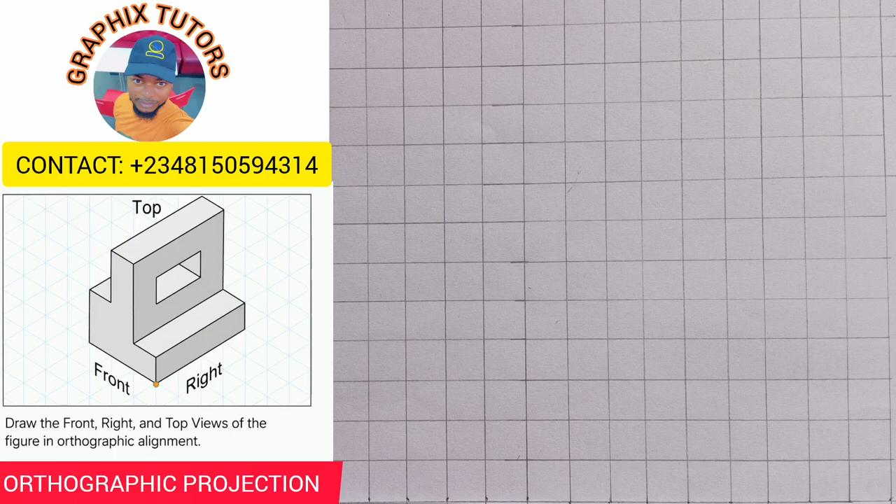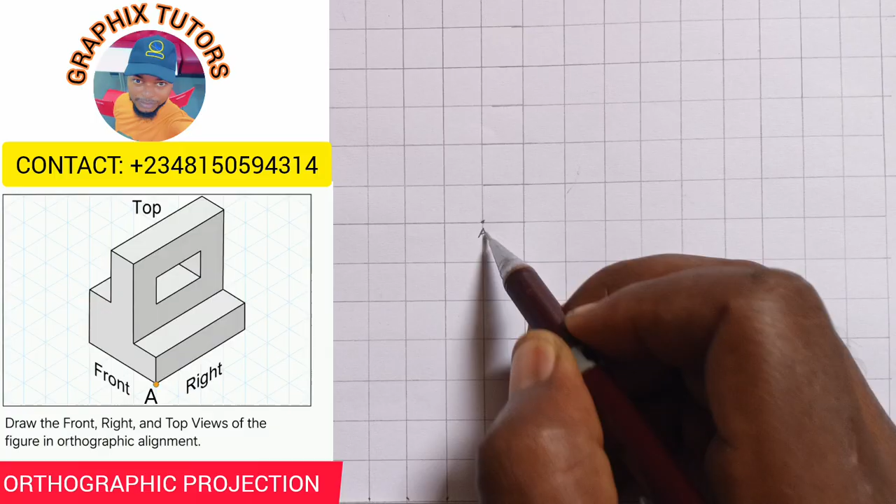Now, like I told you, each of those boxes you see is 10 millimeters, unless otherwise stated. Now, the lowest point here is the point that has the yellow dot that you can see, right? So I can say that point there should be my point A. So I'll pick a point anywhere of my choice. Let's say I'm picking here, right? This is my point A. I can easily zoom it up so we have a clearer view. That is my point A.

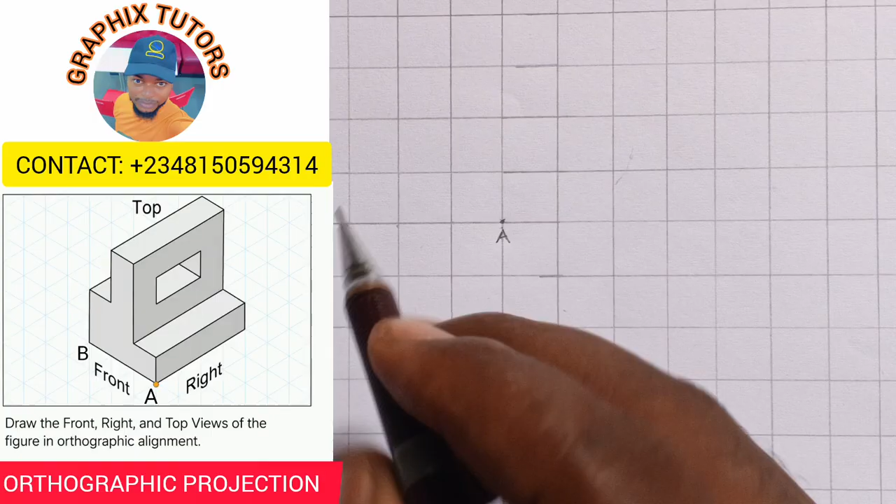Now, if I count backward, because it's going back, I'm using the grid. Each of these grids also is 10 millimeters. So I'm counting back, I have three boxes, meaning it's 30. So from A to B is 30. So 0, this is first box, second box, and we have third box. To point B is 30. So I'm going to tick it right away. 30. Right? Then I want to move to C.

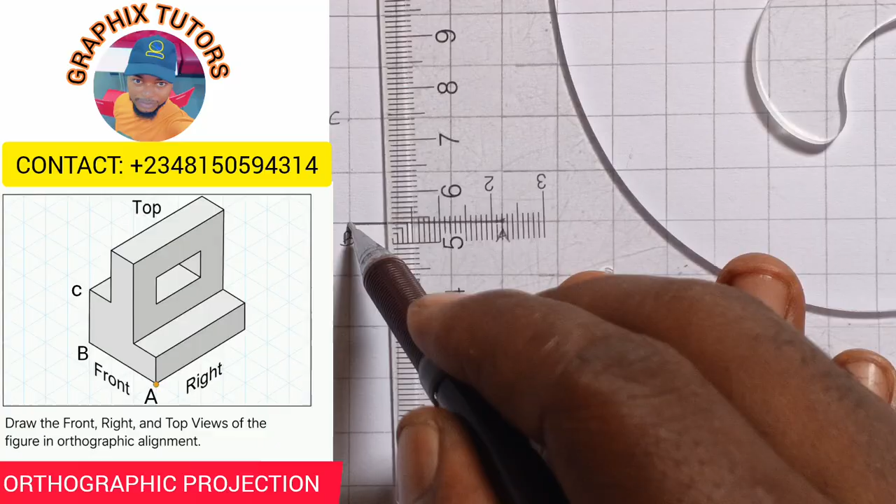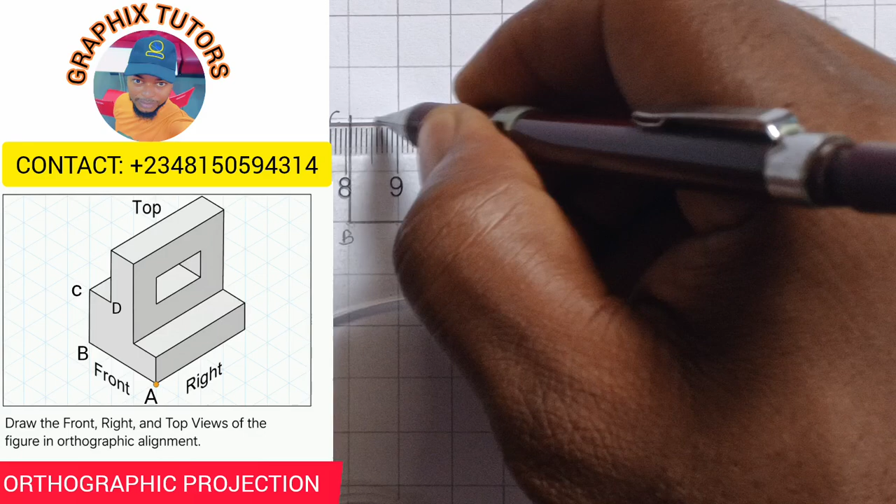So from B to C here, we have two boxes making 20. So I'll move B, 1, 2 to point C, and I'm going to also tick it. Can you see that? And from C to D is just one box. So I'm going to draw just one box. And that's my point D. And from D to E, those are the points I'm looking at when I'm looking at the front. From D to E, I have two boxes. So I'm going to tick it to the two boxes here. Right? This is point E.

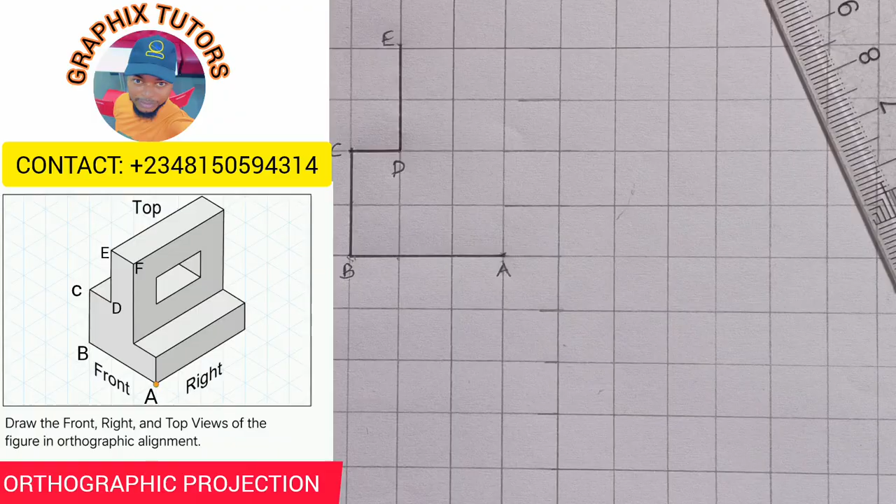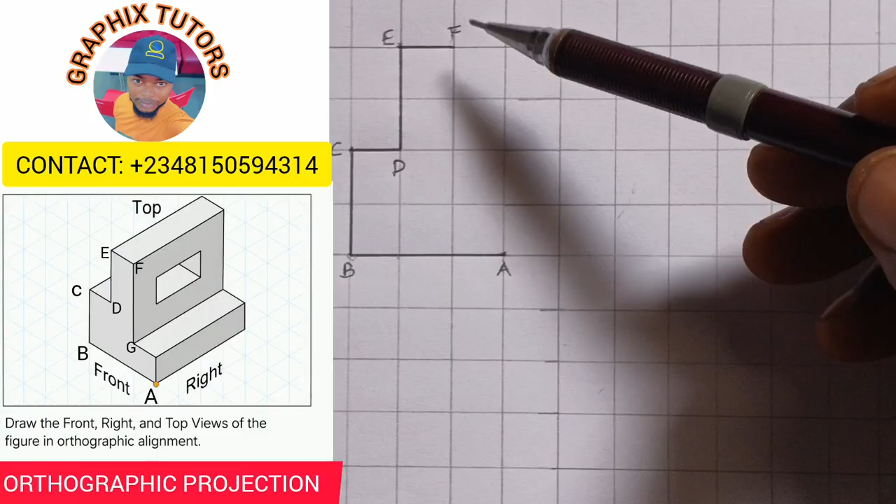So let me bring it down so we have a clearer view. Hope you can see that. So from D to E, we have two boxes. Then from E to F, we only have just one box. So E to F, going towards the right, just one box. Then from F to G, we have how many boxes? Let's count from here. This is 1, 2, 3. We have three boxes, right? So 0, 1, 2, 3. So this point here is my point G. So taking it down.

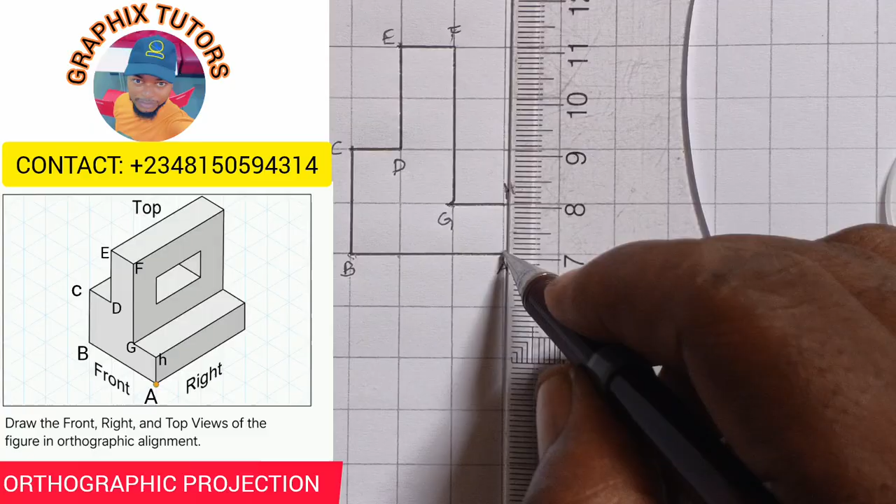Right? From G to H, just one box. So I'll just take it to H, one box. So this is my point H. Then H back to A, that is the yellow dot. We have just one box. So what you just saw here is the front elevation, the front view.

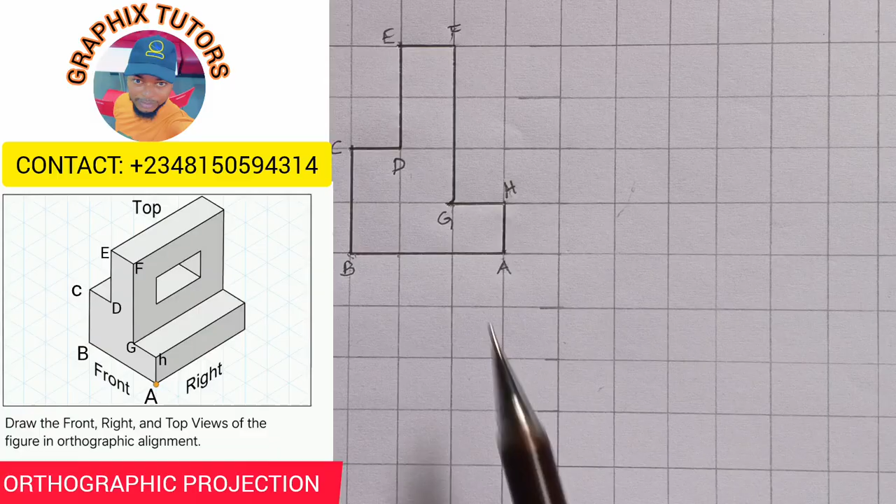After the front view, you can draw either the elevation or the plan. I can start from the plan, but let me just start with the elevation, because the front and the right are always side by side. So we'll leave a box or two boxes in between, but let me just leave one box in between. So I want to draw the right side, which is looking at it from this side. Remember, we have A, meaning that I'm going to be starting from A again. So from A, again here, I stop at H, right?

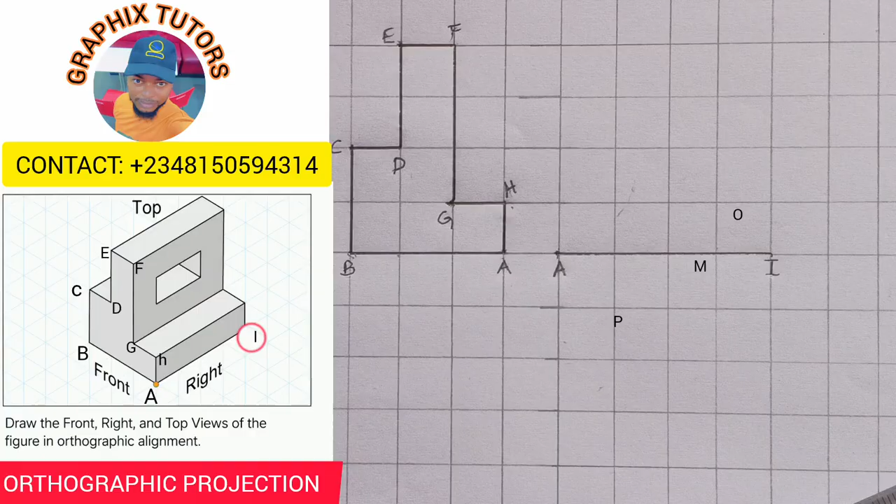So to the next point here, let's call it I. We have how many boxes? 1, 2, 3, 4, 4 boxes. So I'll just draw my 4, 0, 1, 2, 3, 4, and take it to I. So that is the I that we have. Right? Then moving up to J is another 1 box. Then the next one is moving it back to, remember it's H already, right? So I'll just connect J and H this way.

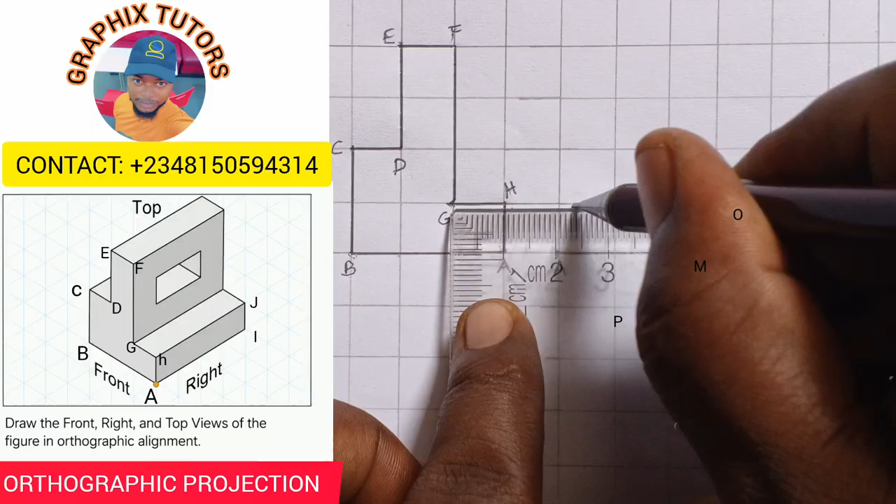Then I'll also connect A to J, to A to H, because here also will be what? H. They're always the same, right? Now the next thing is this first line you see, that is H and J, is overlapping this other point you're seeing here, which is G. And let me call the next one K. We cannot see K because J is overlapping K, but this is my point K. Is that okay now? So it's overlapping, we cannot see.

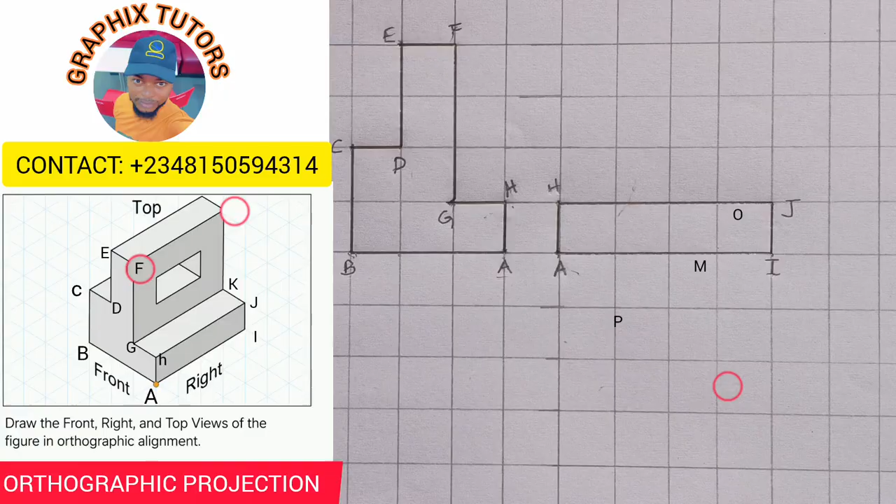So we'll move forward, upward again. So you'll be seeing J like point K. So if I say K, it means I'm saying J also. So from K up here, right? I'll count how many boxes: 1, 2, 3. 3 boxes. So J and K, I'll put them down here at the same point. So I'll count 3 boxes upward, which is from here to this point, and that is L. Remember, here also will be the F.

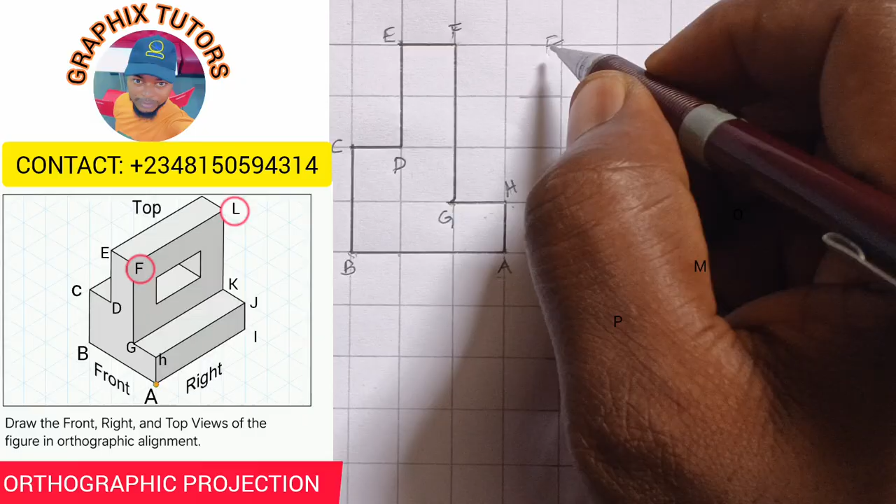So from L to the next point, M, I'll call it M, because M also will be here on the same point. Because F and M are on the same line, I put both of them together, but L is connected to M. So whenever I see M, I'm seeing F also. So we're moving forward. Now what do you notice? F is connected straight down to H, or M is moving down to H. So I'm moving down straight to H. Hope you can see that.

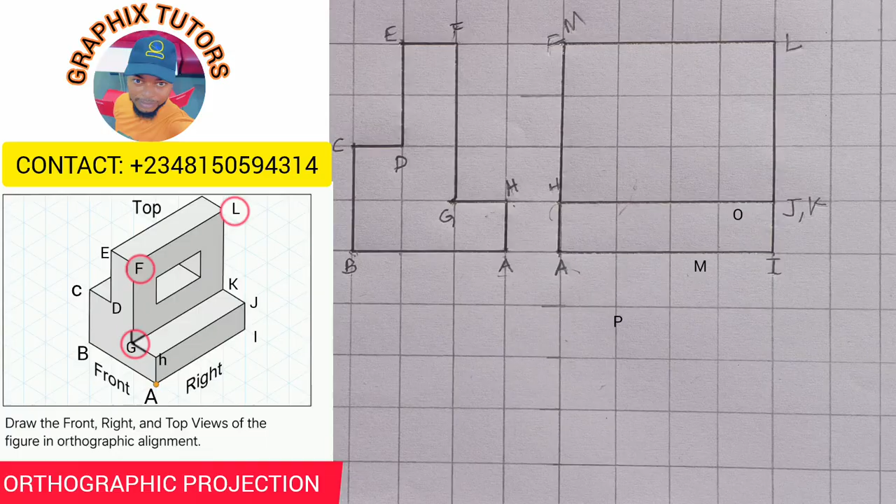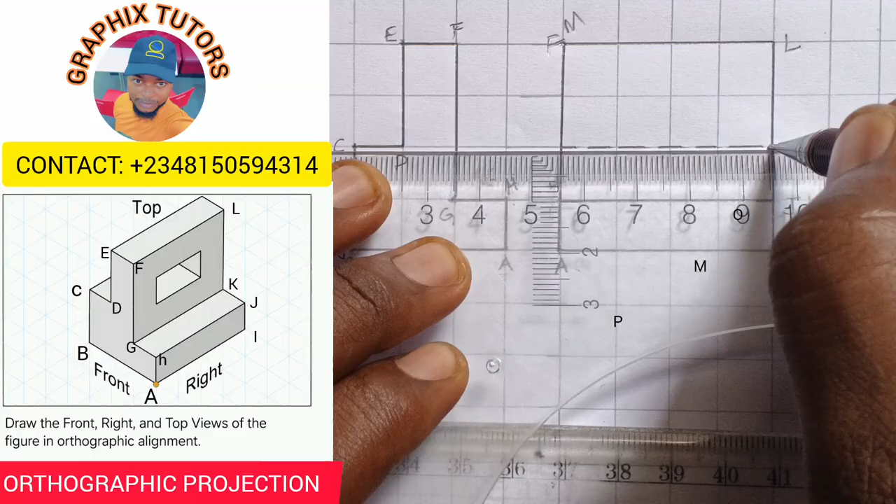Now there's something wonderful that's happening here. If you're looking from here, you discover that there's a point here, and that point is point D. But we cannot see it when we're looking from the right side, because it is behind it. So to show that point D is here, look at the line of point D. Because point D is behind, we cannot see it from the right side, so we're going to use a hidden line. So that is my point D here. This line is for my point D. Now we'll move forward.

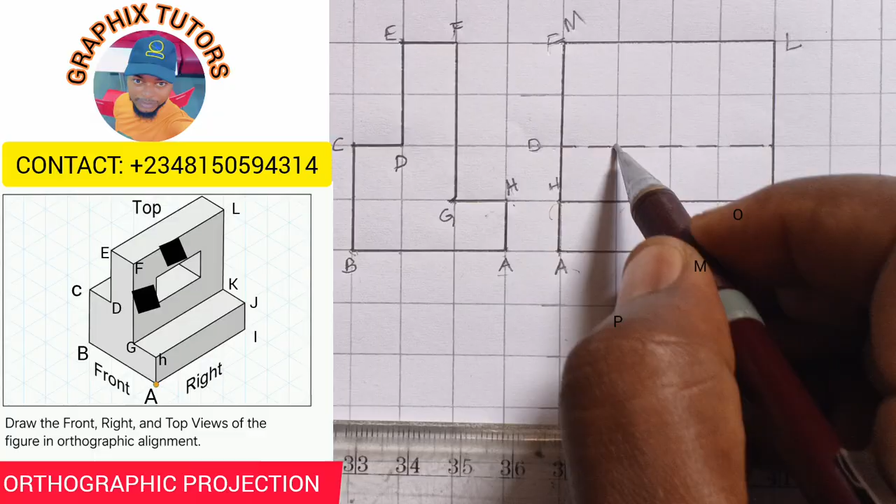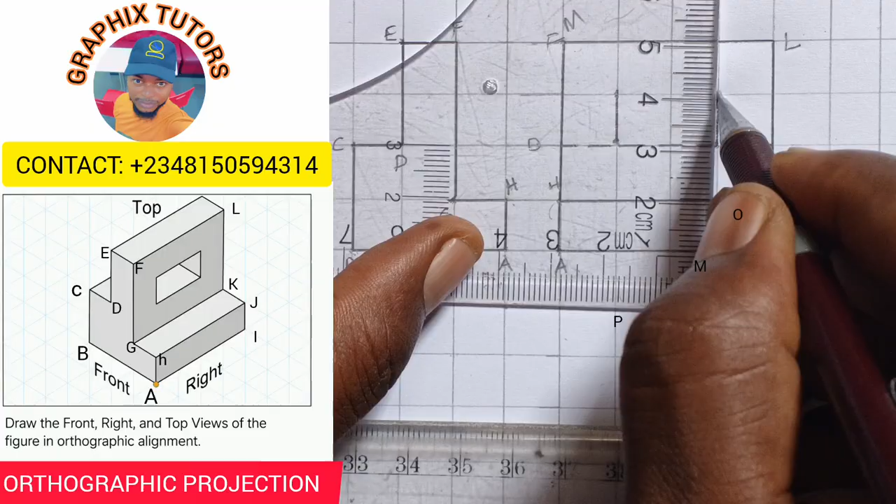Now if you look closely, there's a box in between. To get to that box, from the top down is 1 box, from the left is 1 box, and from the right is 1 box. That means from here, 1 box. From here, another box. From the top, another box. And from the right, another box. So we're leaving 1 box outside, 10 millimeters outside. So we're going to be having this rectangular box going through. Hope you can see that.

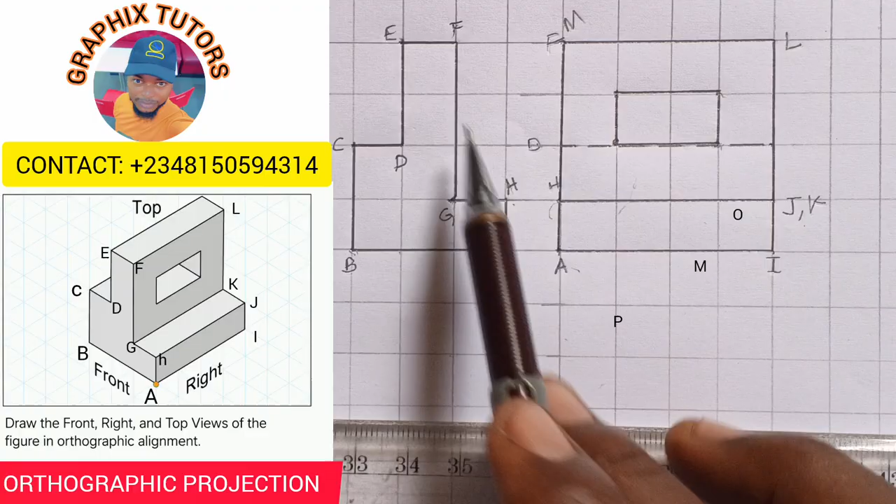Now remember, it's a hidden line here, then we have this box overlapping this. If you look carefully, looking from the front, you cannot see this box, because it is blocked. So to show that this box is there, you use your hidden line to show that if I'm looking from the front, there's a hollow box in between that I cannot see. So I'll just use my hidden line. Here also I cannot see it, hidden line. Meaning I cannot see these two points, that's why I used a hidden line, looking at it from that side.

So I have successfully drawn out my front and right elevation, or say my front and end elevation. Are we together? Now the next thing is for us to draw the plan. The plan is always under the front. Always remember that: under the front, the side you're starting with. So if I put it here, it means I'm making here my front. If I put it under here, it means I'm making here my front. And remember, this is the front.

So I'll leave a box in between, or you can leave two. You can even leave three, depending on what you want, but I prefer leaving two. So let's start from the front. First of all, just draw a straight line this way.

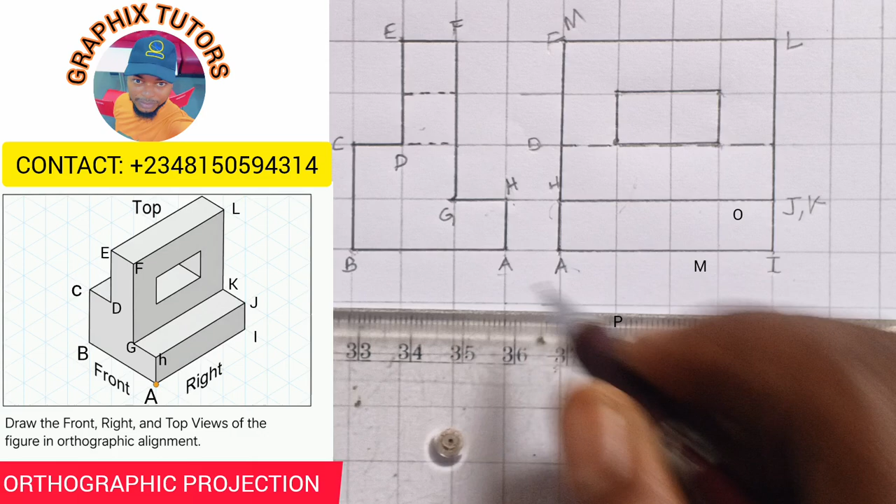Can you see that? Then you can easily draw your 45 degree. Look at what I'm doing. Just in between those boxes, the inclined line of the box. Can you see that? So I can just easily draw that out.

Right? So meaning that since this is coming down here to touch, let's be very careful. So we're coming from here to this point. So since this is coming down, it is meeting at this point. So this is, then it's coming like this too. It's coming like this. So meaning that my box will be like this.

This is the end of it. And this is the end of it. So it must not pass this line. This line you see, that is the highest point, right? When you put your 45 degree here. Or just know that the length of this is the height of this.

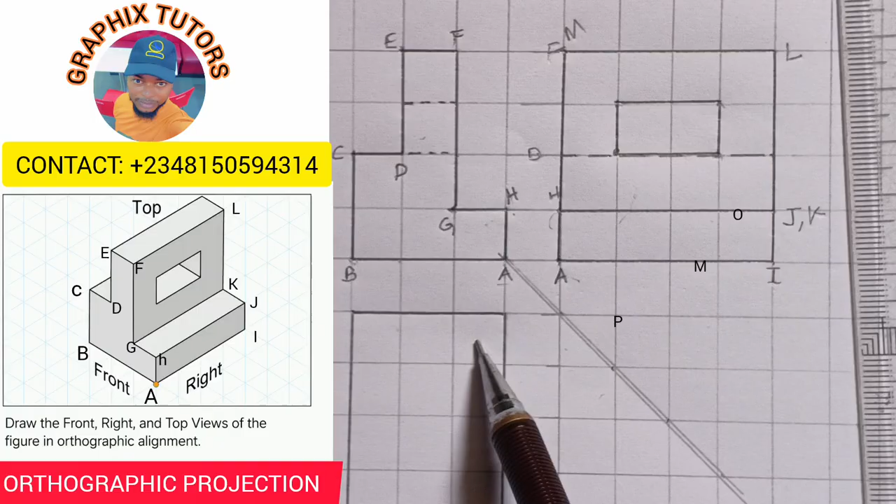So if here is 0, this is 1, 2, 3, 4 box. This is 1, 2, 3, 4 box. So the length of this is the length of this. Or you can use this inclined line. Right, so let me bring it down a little bit so we have a clearer view.

So this is what I mean here. The length of this is the length of this. We have 1, 2, 3, 4. We have 1, 2, 3, 4. So they have the same distance. Is that taken? So let's now move.

So if you're looking at it from the top, you're going to see this line here that you're seeing. So I'll draw it straight down. Should I do that? Hope you understand what I'm trying to say. You see this part, this top, this from E to F. And this is the line of E to F. And it's going from the beginning to the ending.

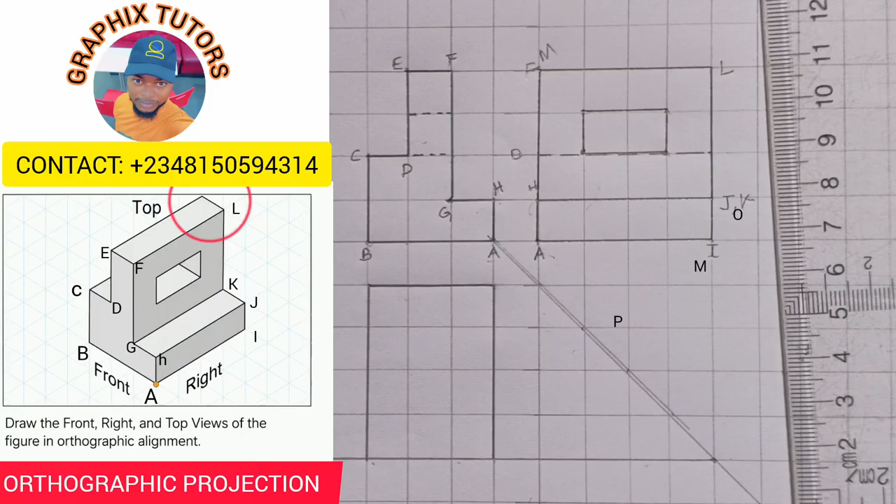So I'm going to bring this down from beginning straight down to what? To the end. This way. And from beginning straight down to the end. Hope you can see that. Now, then, if you look at this again,

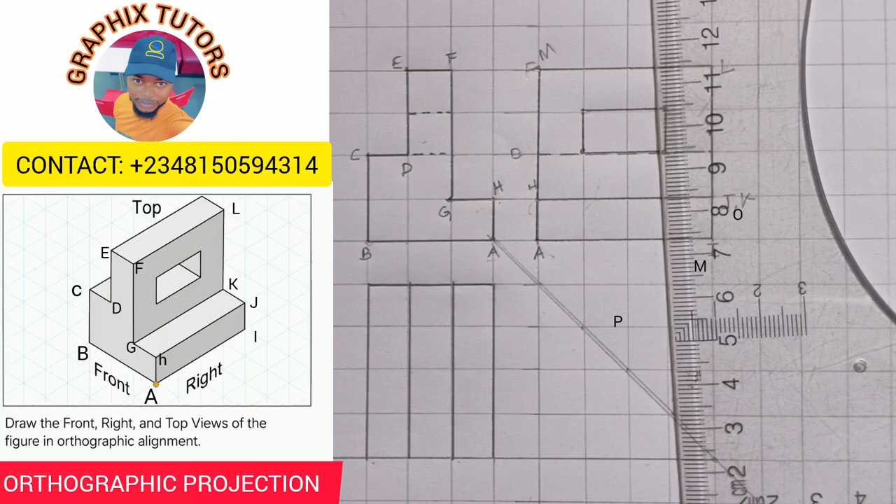right? If I trace this down, this point, I want to see it is meeting here, meaning that this part here will be hidden because the hidden line is here. So it means this part here will be hidden. This part you see. And if I go to the second one too, the end here, I bring it down, meeting the diagonal, meaning that this part here too will be hidden.

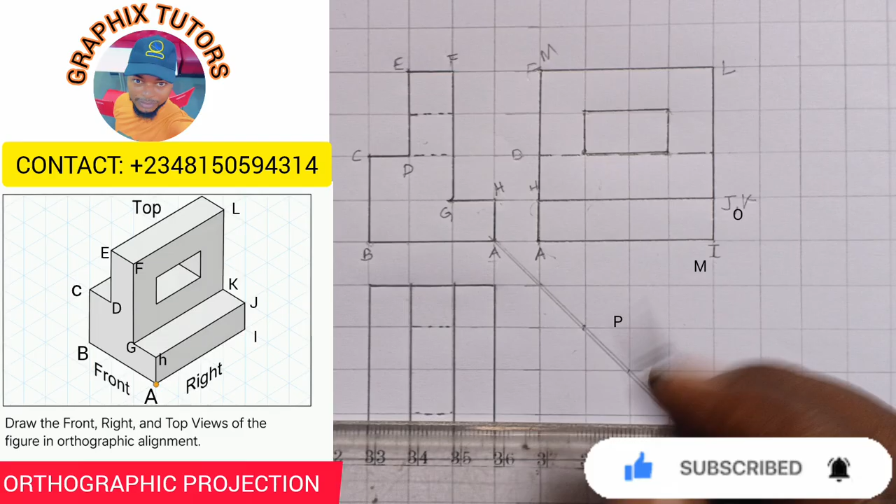Can you see that? So looking from the top, this side you're seeing here, which is this side, is all this side here. And this side you're seeing here is all this side. So in terms of plan, you don't know the difference in elevation. When you're looking from the top, there's no difference in elevation. You see them as if they're on the same position.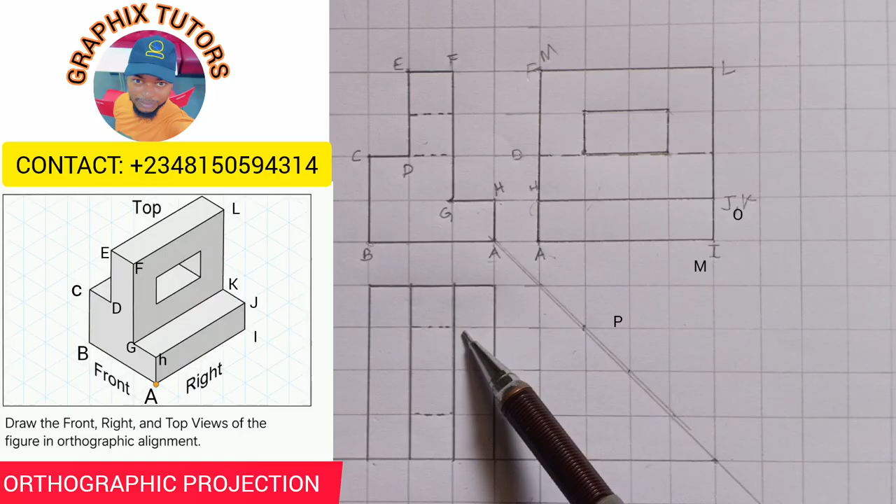So it is the elevation that will tell you the depth of it. They are all together now. So this is what we'll talk. This is what they say we should do. So looking at it from the top, the right, and the front elevation are all together. So what else again can I input here?

So this is also in first angle projection. And when these two are coming down and this is going up, it is in third angle projection. Remember, wherever you place the plan, that means you've changed everything. I put the plan here. This is now my new front elevation.

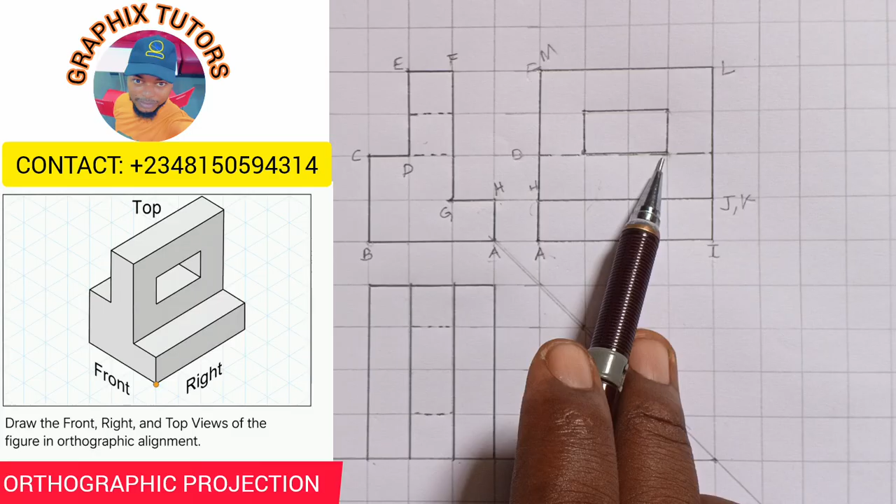So it means that when you're looking at it from the top, you cannot see this that is there, right? You cannot see this figure looking at it from the top. That is why I'm using hidden line here, because it's a top view.